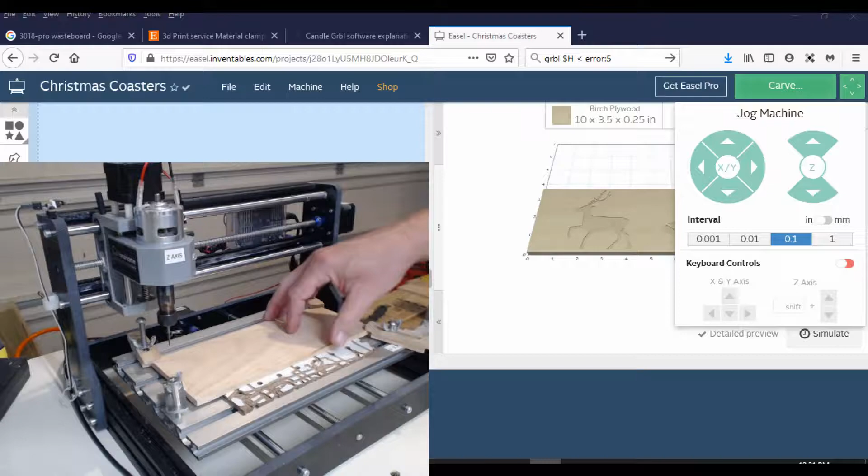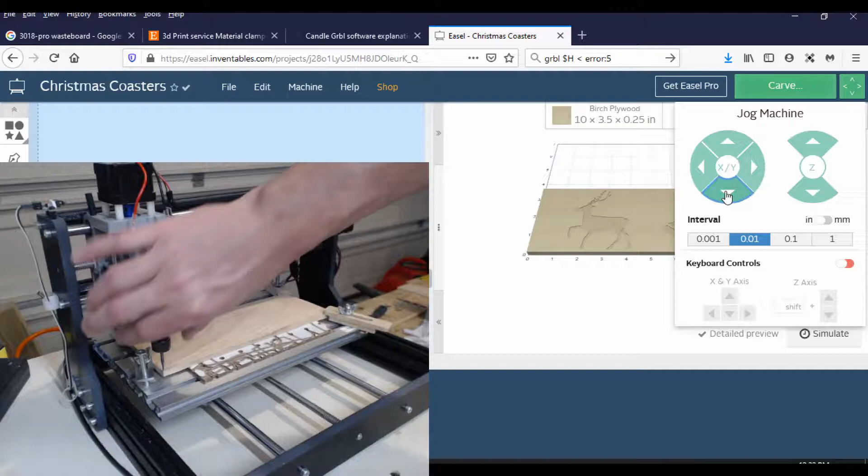So I'm going to go ahead and move my bit down to the leftmost part of the material, get it as close as I can here. Now I'm going to have to slow down the interval because I'm going to need to move it. Let's see, a little more here. Bring the bit down so I can see how close I am. No, needs to come back. That's pretty good there, and it's actually, I can go a little bit more this way. Pretty good there.

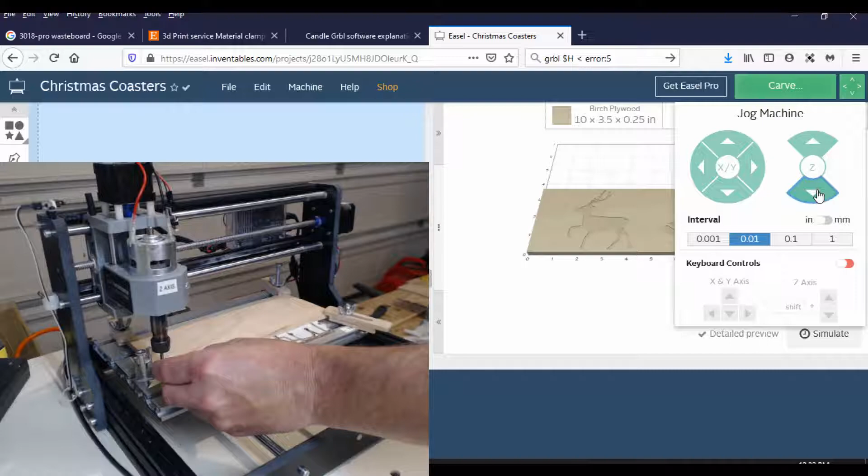And now, as before, we're going to set the depth, which I like to get a little sticky note for. And we're going to lower this bit down. Oh, there we go, just grab it now. So that's her, that's going to be my zero point. I like to do that ahead of time just to make sure that I can get where I need to go. And we are ready to go.

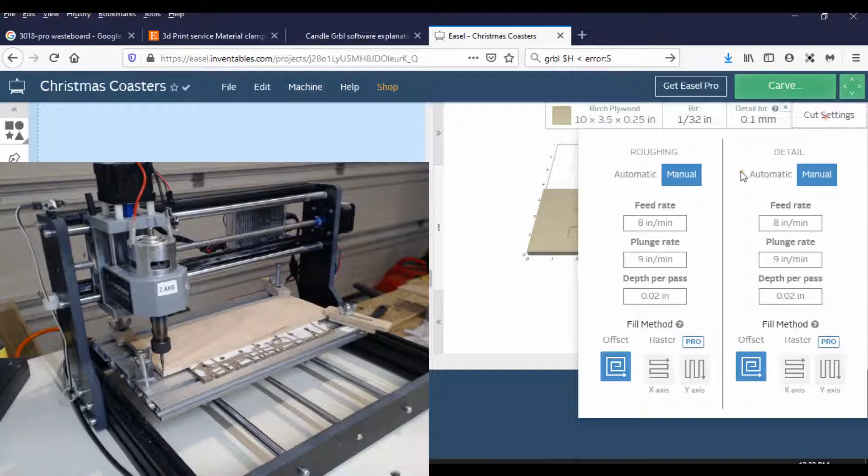So what we'll do is we're going to go up to carve. And again, let's just double check everything. And there is something else too, I think I want to change my cut settings a little bit. I want to raise these up to 10. Do a couple little modifications. Make sure that the board is set 10, 3.5, 1/4 inch.

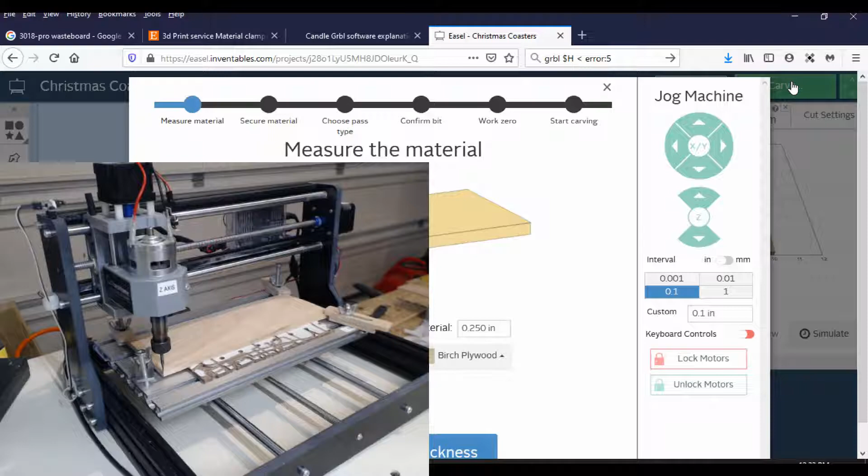Everything's good, I've got my 1/32 bit in. So when you're using 2 bits, this is the first thing that you can do. It's going to ask you which one we're doing, which you'll see right now. So let's go to carve. I'm going to go ahead and move this out of the way for now.

And it's going to confirm our thickness. Yes, we've already got it already zeroed, so we don't need to move or jog it anymore. We have clamped down the material. And now remember, we had 2 bits: there's the roughing bit and then there's a detail bit. So in this case, we're going to choose the roughing pass first. And once we're done the roughing pass, we come back and do the exact same thing, and then we would just choose the detail pass, of course, after we change the bit and everything.

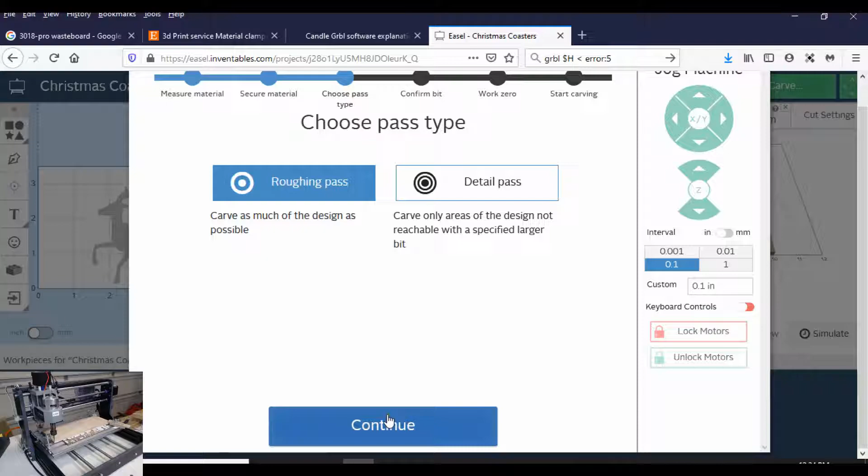So I'm going to click continue. Yes, I have my 1/32. And we are using a new position. When we do our detail bit, we're going to use last position, but since it's the first time, we're going to choose use new position. And then that's it, we should be ready to go.

And I'm going to raise the bit, turn the spindle on, tell it it's on, and then click carve. I will maximize the screen so you can see, and then immediately have my mouse up top, getting ready to stop it if I have to. So here we go.

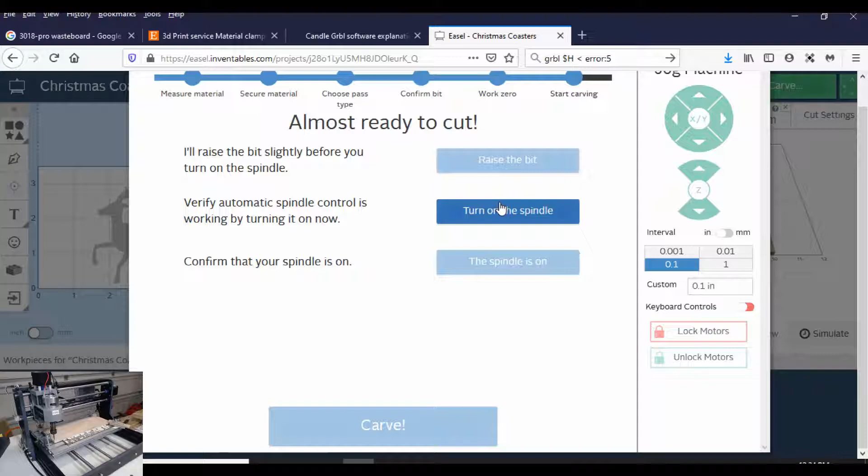Spindle's on, carve. I'm going to go ahead and raise this up so you can see. And I'm ready here to stop it or speed it up or slow it down if I have to. I think I'm actually going to slow it down a little bit.

Could probably speed it back up a little bit, but let's see how she goes on. Alright, let's let that cut for a bit and we will be back.

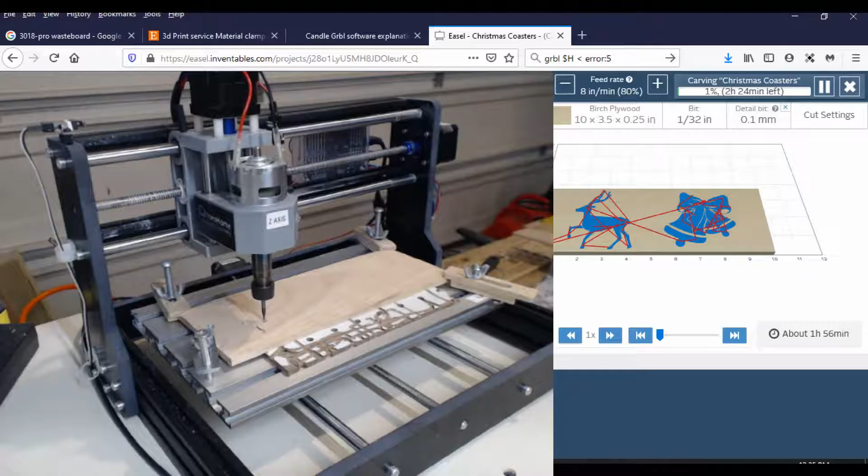Alright, we are finished. I had a little bit of camera difficulties here. I'm going to just close this out and clean that up. Now we got to get our detail bit on there, my fancy dancy little thing here.

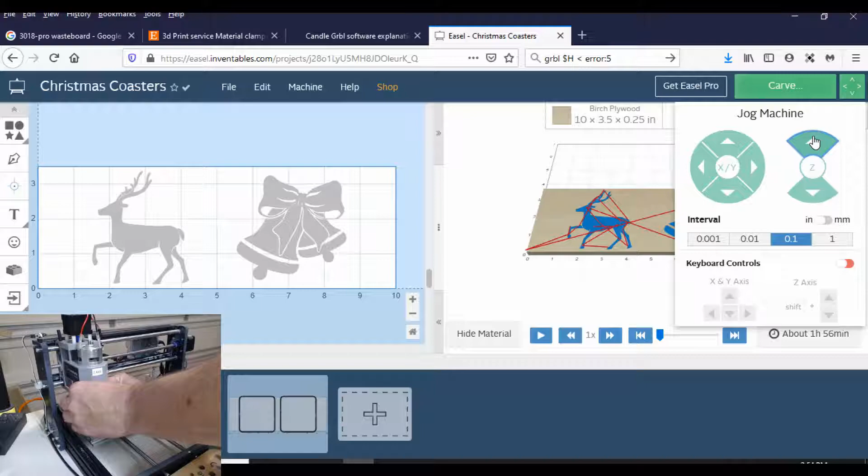I'm actually going to raise my bit up a little bit, but I'm not going to move it left and right, only want to raise it up a little bit. Get my other bit in here. Always want to try and at least push the bit up about 3/4 of the way through.

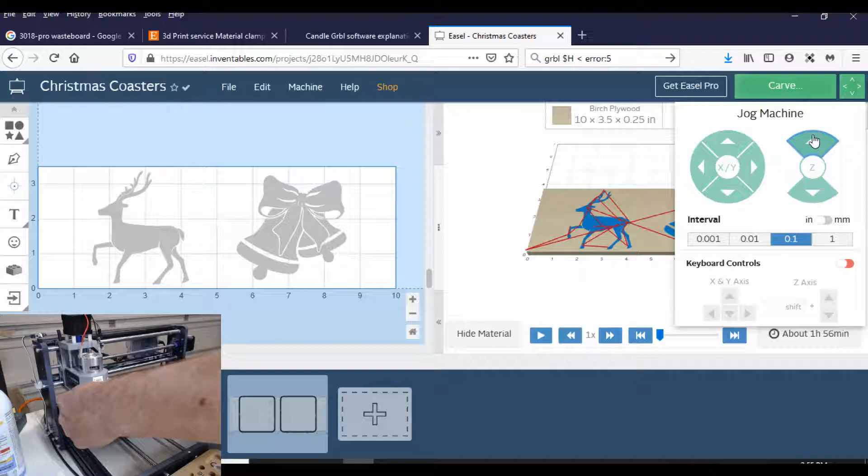That there, and so let's move this over. There, and that is not enough. So if you notice, if this happens to you, I don't have the bit down far enough here, so I'm actually going to have to lower the bit a little bit more because it's bottoming out. It's not down far enough.

Technically, if I had to, I could lower the motor down, but I don't like doing that. Let's see if we can get that out of it.

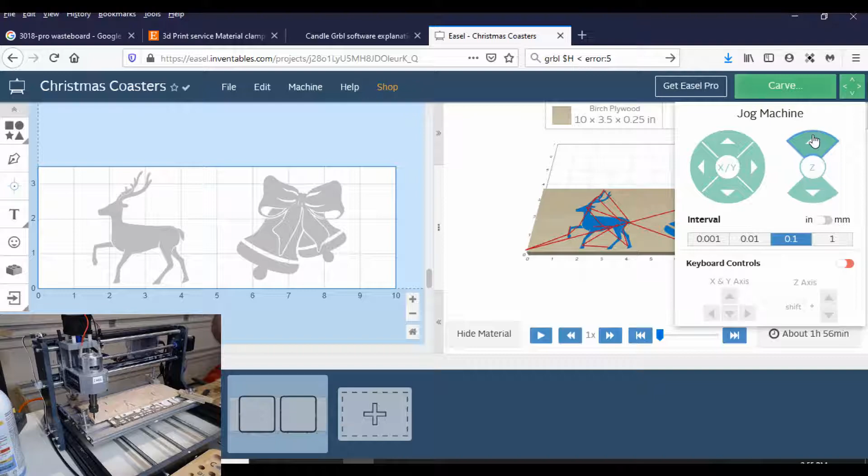Little trick is what I kind of do is, I don't know how well you can see this. I'm going to zoom you in over here. One little trick I do is, if you see this gap right here, that gap should be greater than the gap between the bit and my wood. Because if it's not, then that means this is going to hit beforehand.

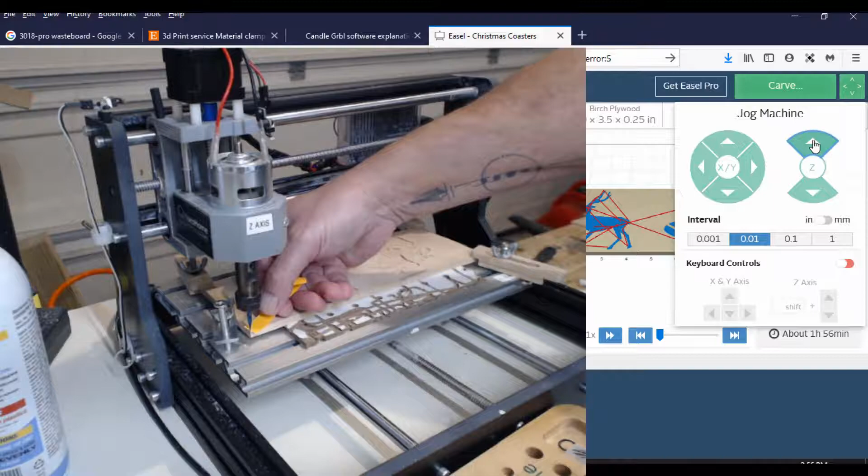So let's see where we're at now. That is pretty much dead on right there, actually. So again, I take my little sticky notes and I'm going to come up just a tad. Maybe a tad more. Goodness, maybe a little more. There you go, so that is going to be my zero point.

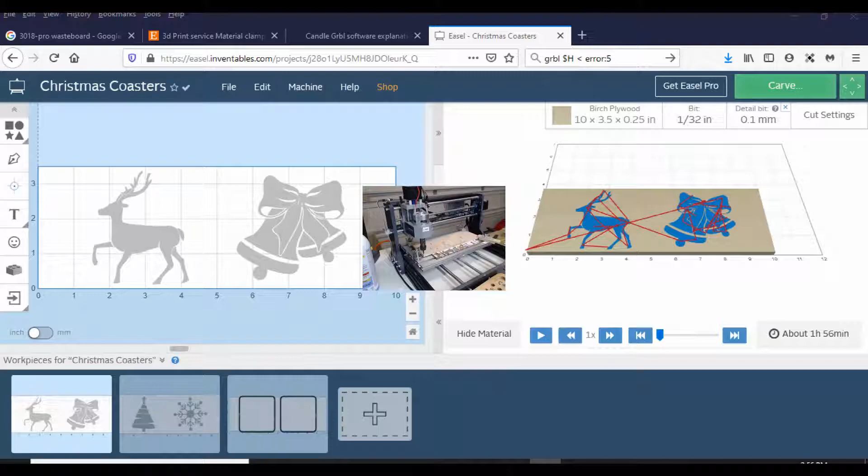So now that I've changed the second bit, what I'm going to do is let me shrink this down, and we're going to go through. And as you can see, let me put this in. Oops, sorry, middle, left. So now what we're going to do is we're going to choose the same design.

When we go to carve this time, well, because I have that there, as you can see, confirm thickness, material is secure. Now this time I'm going through the detail pass, and I've already changed my bit that's going to be on here.

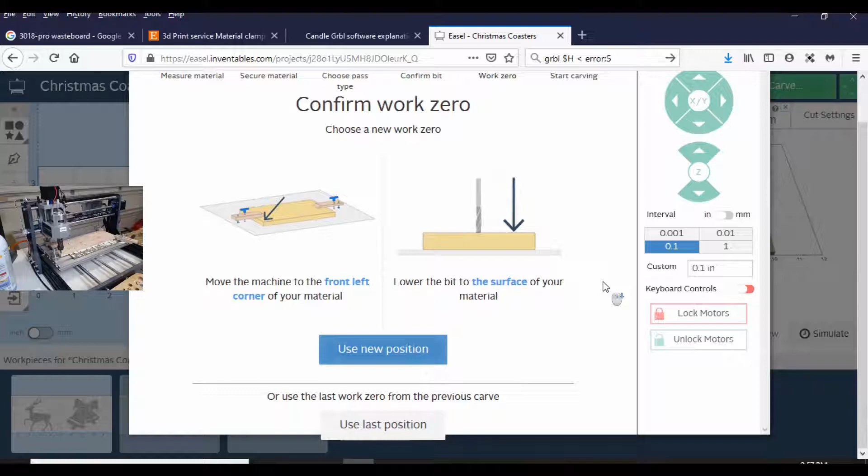When I click continue, you're going to see that it is confirm your bits, the detail, use a portion of the design. It's going to be that one. And we're going to click, normally I would do last position, but I am going to use my dead on right there, so let's do that and use new position.

And we're going to raise the bit, turn the spindle on, start, and carve. Now what it's going to do is go through and do all the good detail work.

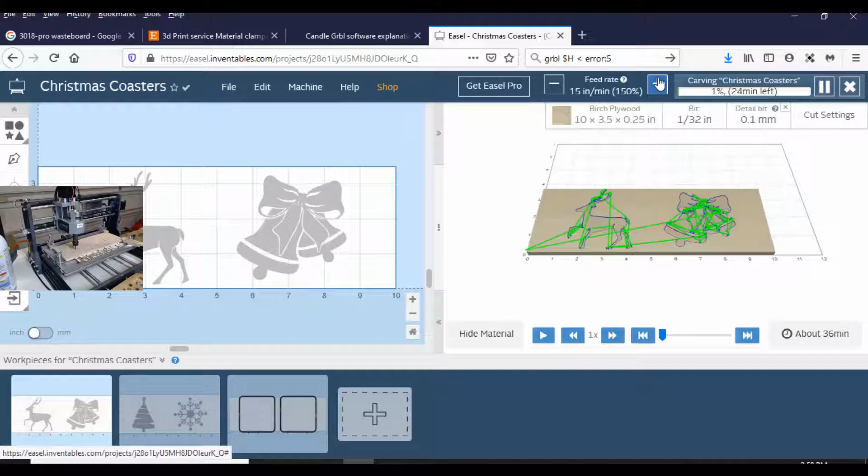So as you can see, I actually speed it up a little bit and give it at 15. Let it do its thing. Let me maximize this for you. So you can see it's going through, and I'm going to clean her up.

So as you notice, when I started my feed rate at 10, I can raise or lower, which is nice. So I got it back up to 15 now.

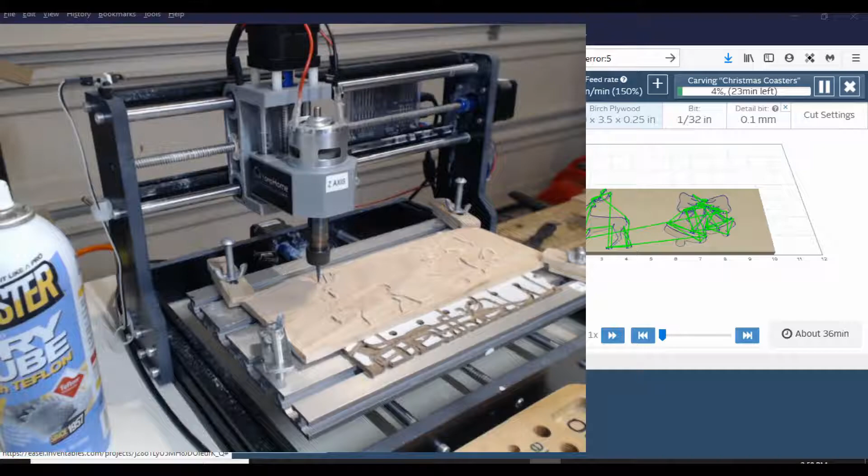We'll let that clean up, and I'm going to give it a little squirt with my dry lube here, just a little bit, and good to go.

Alright, we now have a finished cut, and now we're going to go and cut these babies out. They came out pretty good. So let's change our bit to an 1/8 inch bit. And I definitely got to move my bit up to make some room in there.

My little... here, let's see. I'm going to go with this one here.

Don't forget, we're cutting all the way through, so this one won't matter so much because it's only 1/4 inch. But if you're going to go through a thicker piece of wood, don't forget to leave enough room for your bit, so you don't want the knuckle here to hit any of your clamps or anything.

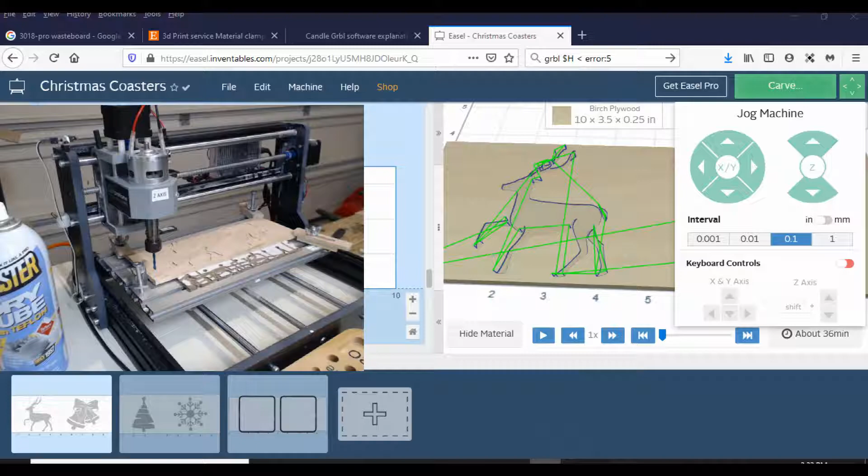So what we're going to do is lower this down, drag it here in the center, and I'm going to click on here.

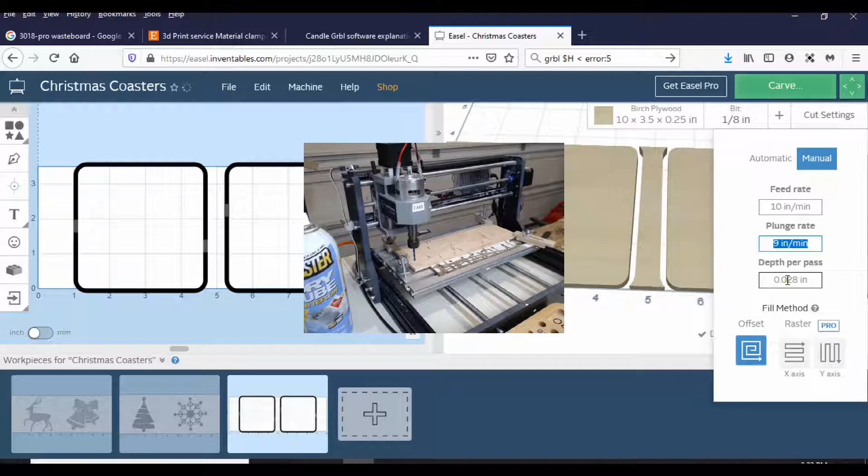Now basically I just want to double check everything. I got my 1/8 inch bit. My cut settings is 8. Actually, I'm going to change it to 10 because I want it a little deeper. I'm actually going to lower that down a little bit to 2. And I got a tab here, those two over here, so we're good.

Let me get this out here, out of the way. Like I was saying, I got 1/8 inch bit. Just double checking everything. It never hurts to double check all your stuff. You got plenty of room. Everything's good, okay, all right.

So let's go ahead and zero this puppy in. Let's bring her down. I'm not going to change my left and right axis. That's really important. Whenever you change your bits, or you do the bottom part here, which I call quote unquote layers, when you change your bits, you never change your X and Y axis.

You want to leave that. You're only going to re-change your Z axis up and down because you don't want to change where it's at, because it already knows that it's going to cut the frame here. If it's not going to cut it here, you move your X and Y, you're going to cut it here, and you're not going to be square on. So it's really, really important that you do not change your X and Y axis.

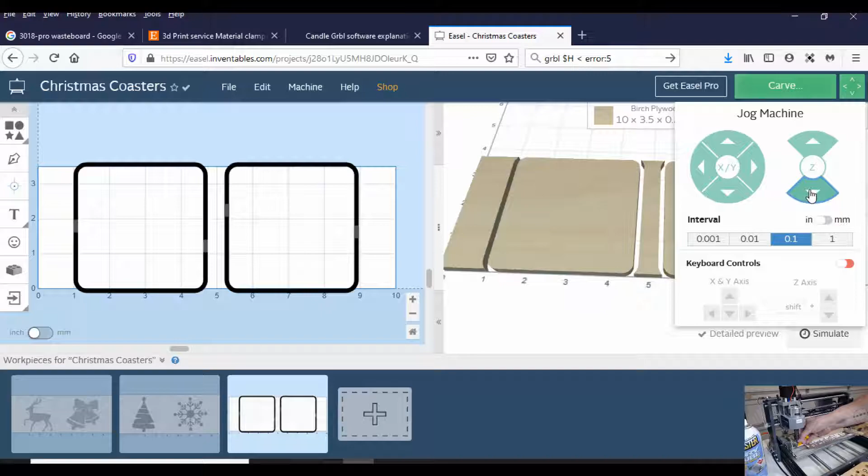You can move it around, just make sure you put it exactly back. So let's see where I'm at here. It's pretty good. Again, you can get a sticky note. Oh yeah, I'm good. Yeah. All right, so let's go ahead and start carving this one.

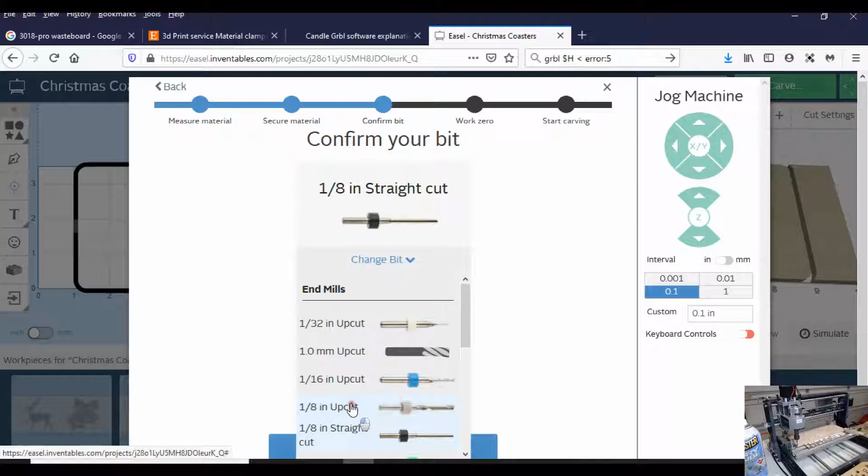1/4 inch. This one's really important to be ready if you have to stop it. An 1/8 inch straight, that is incorrect bit. So see, here we go. As you can see, I've chosen the wrong bit. I have an 1/8 inch upcut. So nope, that's not even the right one, sorry. An 1/8 inch right here, upcut. So that's why it's really important that you double check everything going through.

You know, this is how we learn, this is how we get it done right. So now I'm confirming the bit size, it's what I've got. I'm actually going to use new position because I have it right there, but I have not changed my X and Y, so that's okay. And now we are ready to go.

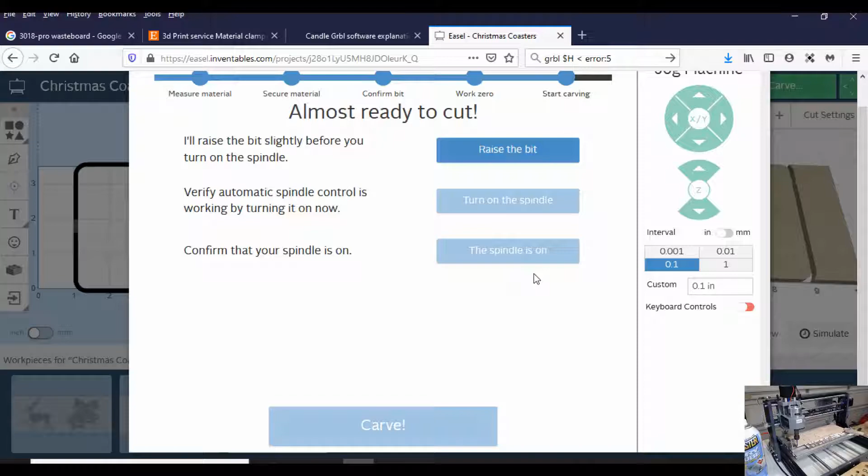Raise the bit. Actually, before I do, let me move this over here, and I'm going to make it bigger for you. Raise the bit. Spindle on, and carve. And I'm going to be ready up here to turn off if I have to, just in case something happens. Always be ready to.

This is some tough wood. Woo.

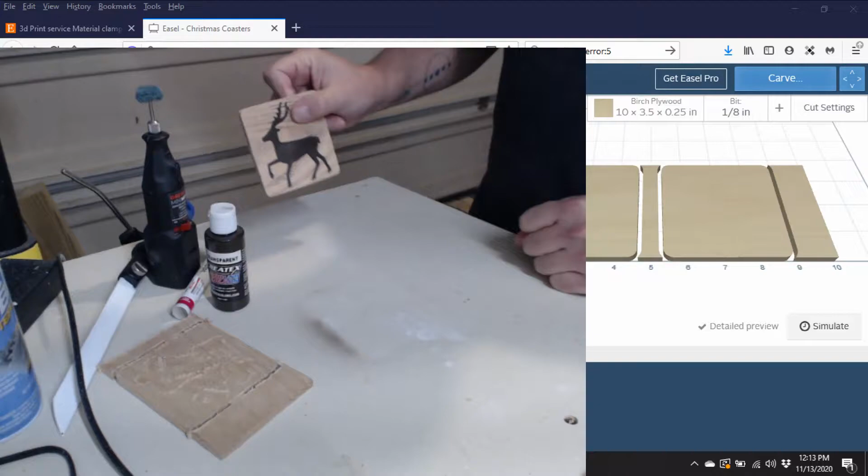And then all I'm going to do now is polyurethane. Put a little polyurethane on there if you can see it. And that's her, pretty much. And I'm going to do the same thing with the bell. And that's how I do my coasters.

These are some of the other ones that I did. Very similar way. This one's polyurethane, if you can tell the shininess as opposed to this one. But they're all pretty much done the same way. That is how I do them.